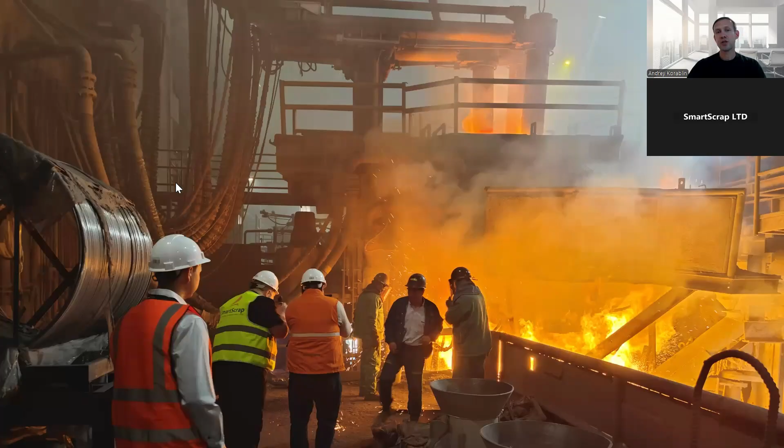I was lucky. I met specialists and metallurgists along the way who explained complex things in simple language. I asked direct questions and got direct answers. I had a chance to visit the heart of steel mills with my mentors.

I didn't read textbooks because they are written for metallurgists. There is no metallurgy for dummies section in them. But I had real experience and I applied that knowledge in practice.

Step by step, I began to understand metallurgical processes, and then I began to teach my employees. Almost none of them have a metallurgical education yet. They work in technically complex sales and solve tasks at the intersection of technology and business. Because I passed on that knowledge, simplified but accurate.

Today I speak at international conferences. My articles are published in industrial magazines, and I host a podcast with leaders of the global steel industry. I also created the online course Fundamentals of Metallurgy, specifically for people like I was 15 years ago.

For those who are not engineers but need to understand metallurgy to be strong professionals. My approach is simple. Each of us has our own unique talent. I can explain complex things in a simple way. For example, I run a Telegram channel where I explain to my followers what's written in the Bible.

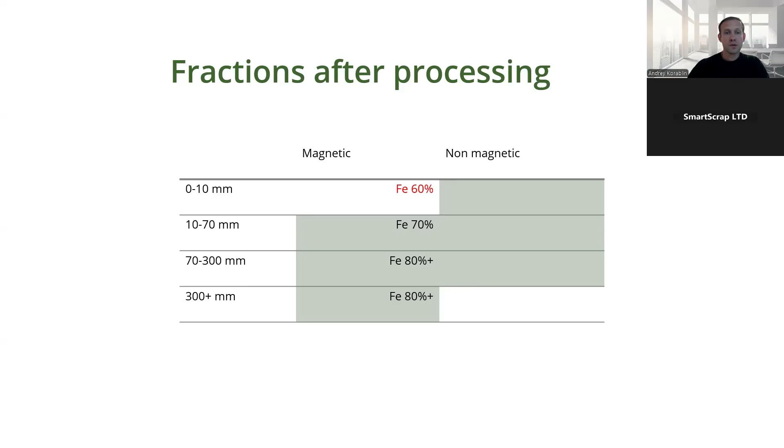Today, sales are becoming more complex, and in heavy industry, which includes metallurgy, solution providers are valued more than just raw material or equipment suppliers. To be one, you need to understand how your potential customer produces their product and makes money. This way, your negotiation options are not limited just to price and payment terms.

So, next let's go to the practical things. I want today's webinar to be useful. Let me share with you part of the material from my course and highlight the most essential fundamentals of metallurgy, which revolve around oxidation and reduction processes.

Iron often exists in compounds with various chemical elements. One of the most important aspects for us is analyzing the forms of iron in compounds with oxygen. Depending on its combination with oxygen, iron can exist in either an oxide form or metallic form. Let me explain what that means.

The primary form of iron found in the Earth's crust is in oxide form. Essentially, iron ore in the ground exists as iron oxides. However, there are different types of oxides: FeO, Fe2O3, and Fe3O4. FeO and Fe3O4, these oxides have magnetic properties. This form is called magnetite, but Fe2O3 is not. It is hematite. The concept that iron ore is found in an oxide form is crucial for understanding the metallurgical process.

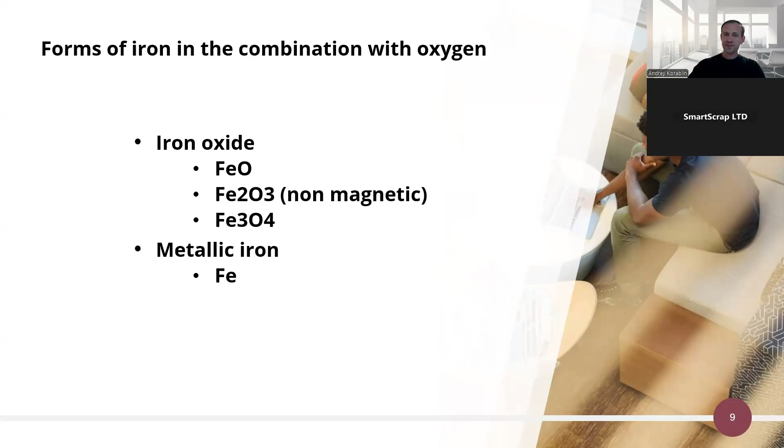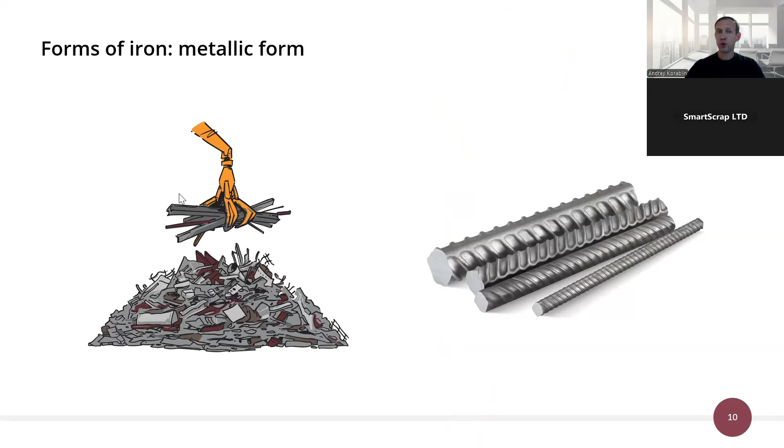But how do iron oxides look? Iron ore, as you might agree, is not something most of us see daily. Perhaps only a few people have visited a mining and beneficiation plant as part of a tour or similar activity. However, oxides are present in our everyday life as well. As I mentioned earlier, iron ore is one example, but there are others.

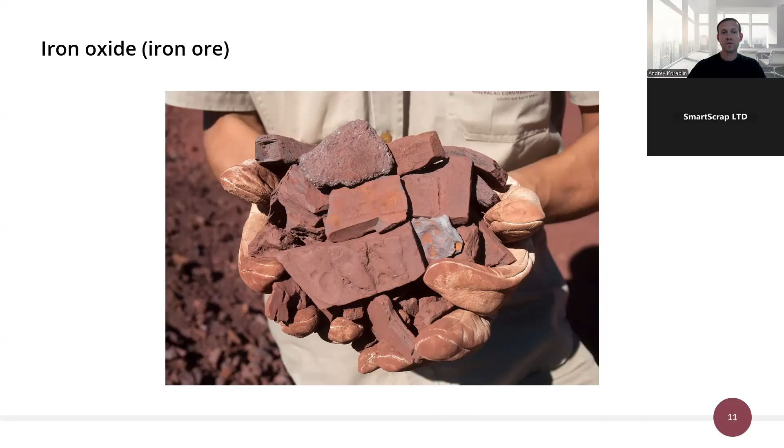Rust is a form of iron oxide. When the surface of metal isn't protected by a stainless or galvanized coating, oxygen interacts with the surface over time, forming a rust film. This film contains iron in oxide forms.

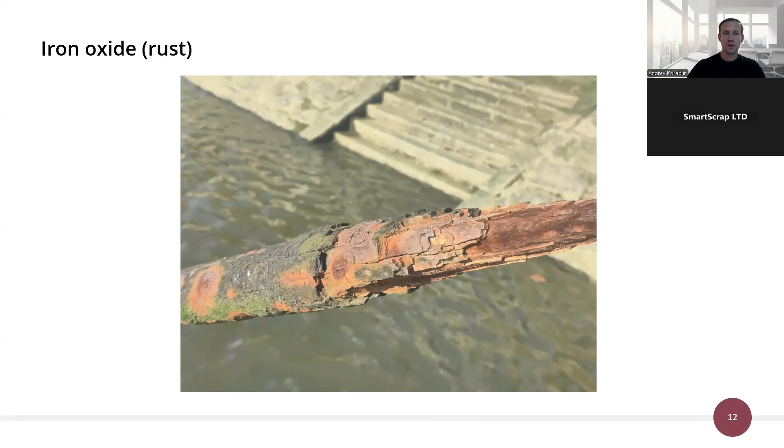Next, just a moment, sorry.

On a deeper level, for metallurgists or those more familiar with the field, there is mill scale. This forms on the surface of a hot steel billet as it exits the continuous casting machine. As the billets cool, a flaky film develops on the surface known as mill scale, which is also iron oxide.

Allow me to share a mistake my friend made. He decided to sell 500 tons of turnings from South America to Pakistan. However, he was just a scrap trader and did not know much about metallurgical waste. Instead of turnings, he ended up selling mill scale. That was how our story went. So this example shows how important it is to know the fundamentals of metallurgy.

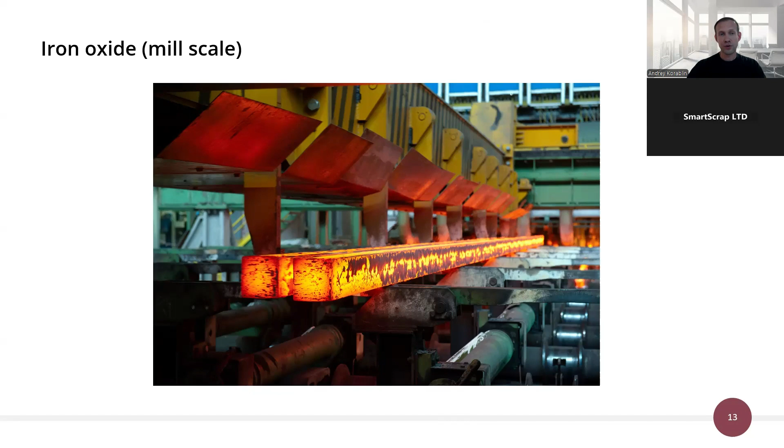Next, metallurgical slag. Those also contain iron, which can exist both in metallic form, such as iron nuggets, and in oxide forms.

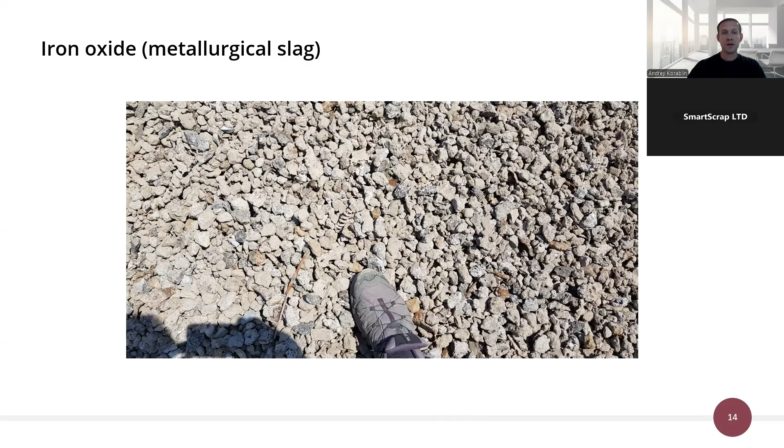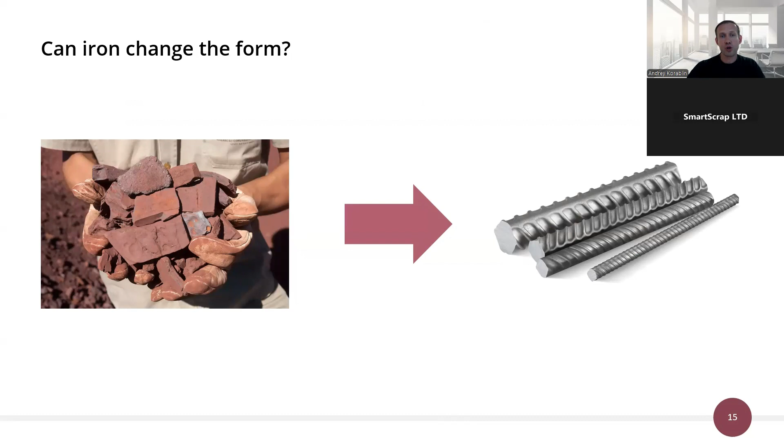Let's go further. The first question: can iron oxide be turned into metallic form? The answer is yes. Many of you may have already guessed this. This process is called reduction. It takes place with the help of certain chemical elements.

There are two different ways for reduction. Specifically, in the first case, carbon interacts with the oxygen molecule, and the oxygen, when reacting with carbon, is released, thereby freeing the iron molecule. As a result, iron is formed along with carbon dioxide, and iron transitions from an oxide form to a metallic form. This is a reduction process.

It forms in the blast furnace. When we add coke, a carbon-containing material, and iron ore, its iron in oxide form, into the blast furnace, a chemical reaction occurs due to the heat. Oxygen interacts with carbon, and as a result, oxygen separates from the iron molecule, producing pig iron, or liquid iron with a high carbon content from 3 to 5%, and carbon dioxide.

A newer method of reduction, which is becoming more popular in decarbonization trends, is direct reduction. It uses pure hydrogen or hydrogen-containing materials such as methane. After the process, we have pure iron. It's called direct reduced iron, or hot briquetted iron, and water in the form of steam.

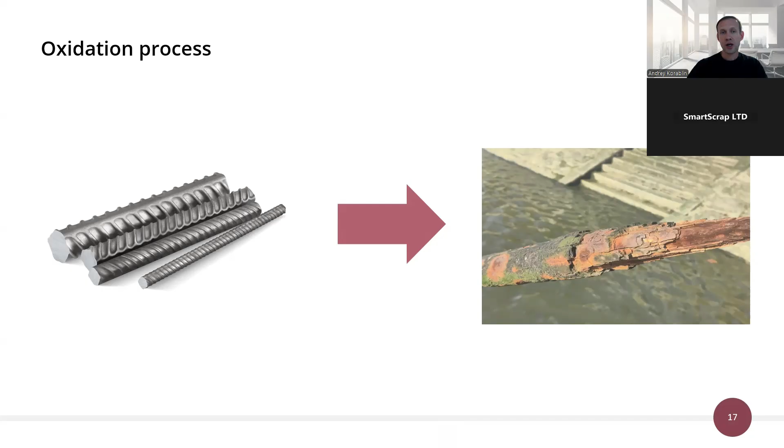In the oxidation process, metallic form of iron interacts with oxygen molecules, forming iron oxides. As we discussed earlier, the oxidation of iron occurs in everyday life when the surface of the metal isn't protected from corrosion. It also occurs in certain types of metallurgical furnaces like electric arc furnaces or basic oxygen furnaces.

In electric arc furnace, oxygen is blown into the furnace as an additional energy source to increase melting speed. While electricity provides the primary heat through electrodes, additional heating is provided by oxygen burners to optimize furnace operation. As oxygen is supplied, some of the iron in the electric arc furnace oxidizes, which is why electric arc furnace slag often has a high content of iron oxides.

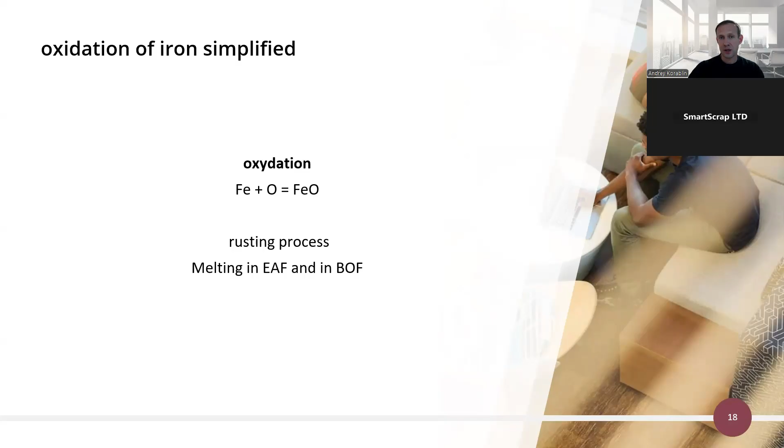Oxidation also occurs in the basic oxygen furnace. The heating is carried out by injecting oxygen under high pressure, and oxygen interacting with iron oxidizes it, converting part of the iron in the form of oxides into slag. So all these processes we will discuss deeper during the course.

As a summary, let's see the definition of the metallurgical process. It is a combination of physical and chemical processes aimed at obtaining a specific metal from metal-containing raw materials.

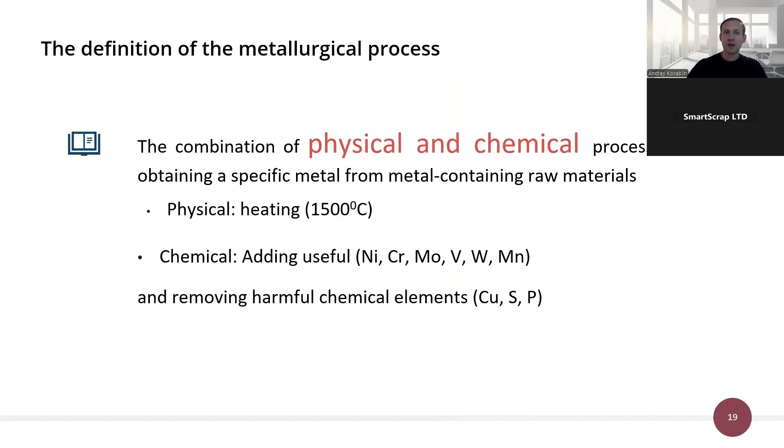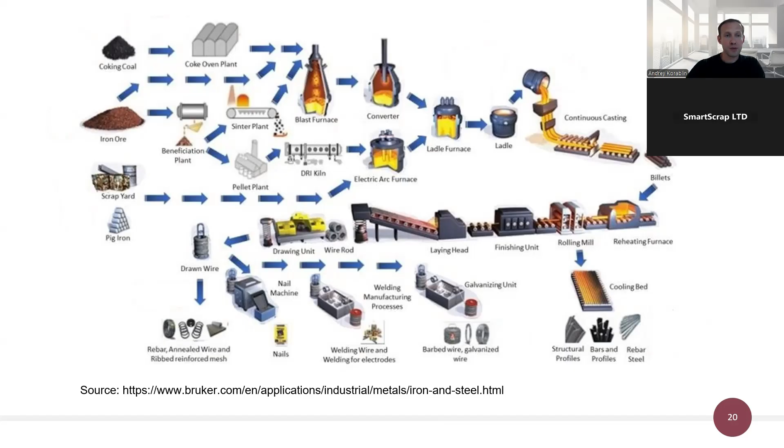So let me tell you one of many cases from our work where knowledge of metallurgy helps us. We shipped scrap to Japan. It is not traditional scrap, it is alternative scrap, extracted from slag. It's called skulls. And Japanese customs was not familiar with this kind of material.

The customs authorities asked what the material was and requested a description of the production process. We reached out to the producer. The response was that this scrap was metal that had been loaded into the furnace but had not yet melted. But that's not actually the case.

Liquid metal from the electric arc furnace flows into the ladle furnace. Unmelted scrap cannot reach the ladle furnace. In the ladle furnace, slag is formed using lime to conduct specific processes. During slag tapping, some metal also flows out and solidifies on the slag dump. It is then recovered during slag processing. And we had to write the process description ourselves and successfully resolved the customs clearance issues.

Today, the topic of our webinar is how to understand metallurgical processes without a formal education. I will outline several approaches.

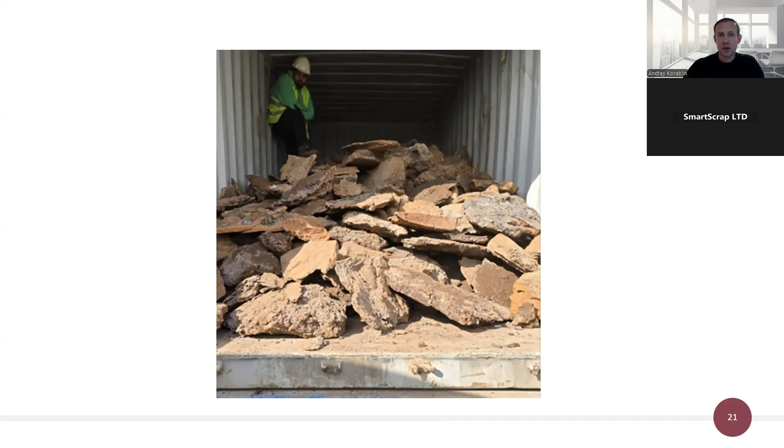First of all, you can study material on your own. Today you have free access to almost any information, you can study everything independently. YouTube, ChatGPT, all of these will help you understand the subject. I want to give some tips of advice.

The first one is to read the book called Learning How to Learn. I remember a very important point from it: sometimes when you study something, you start dozing off, zoning out, your thoughts drift away.

This is a sign that your brain has stumbled upon an unfamiliar word. You need to go back in the text and find the word whose meaning is unclear to you. These may be unfamiliar words or common words that have multiple meanings. Then you need to look up the meaning using dictionaries. You can ask ChatGPT and clarify the unknown term.

Using this technique, your study process may take a bit longer, but you will gain deeper knowledge. You will feel the material, and it will be harder to forget it.

Another important tip: if you work at a metallurgical plant, go to the production site more often. After university, I worked for 4 years at a steel mill in the purchasing department. I often visited the steelmaking shops, rolling mills, spoke with technologists and metallurgists.